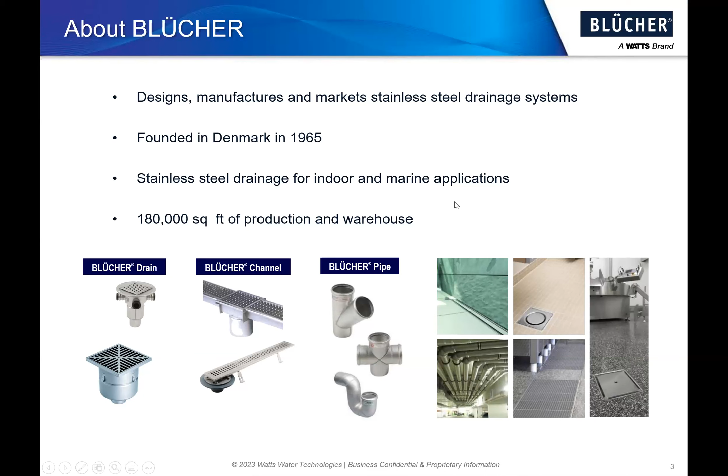There are various types of product lines related to that, as we'll get into, and lots of certifications: IAPMO certified, NSF certified, HACCP, ISO, FDA Modernization Act, ASME standards. Blucher gets quite involved in all of those programs and in the testing.

As I mentioned, it's a global brand, with locations in the USA and Canada here in North America, and all over Europe: Denmark, of course, where it was founded, England, Norway, Germany, Sweden, the Middle East, Asia Pacific. Really quite a global type of company.

Typical applications where Blucher products are found include commercial settings like offices, hotels, hospitals, rec centers, airports, etc. Industrial applications include food and beverage facilities, pharmaceutical, chemical, and biotech. Marine is a big market for Blucher too: cruise liners, yachts, custom yachts, naval vessels. In fact, 85% of the world's cruise liners use Blucher drainage on their ships.

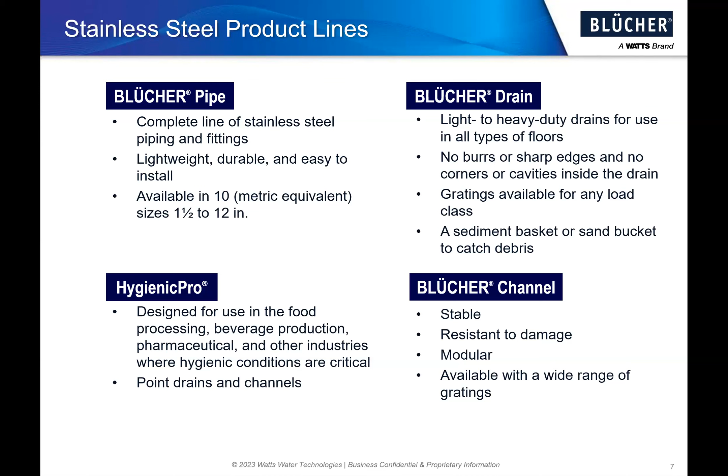So a good collection of product lines to meet a good variety of applications. Specifically, where I guess we would differentiate ourselves from other types of drain products is in the hygienic focused facilities.

In those types of facilities, drains and floors are really important for keeping the hygienic environment in that facility. So it sees all the traffic, any of the waste or dirt ends up on the floor.

It is subjected to some extreme temperatures, either from high temperature discharge from a tank of scalding water or scalding liquid, and also the cleaning and sanitation programs in those types of facilities tend to use very, very hot, scalding, near boiling type of water, and that can be hard on materials.

It can change the makeup of some materials. It certainly leads to thermal expansion and contraction. So those are things that are factors in those types of facilities.

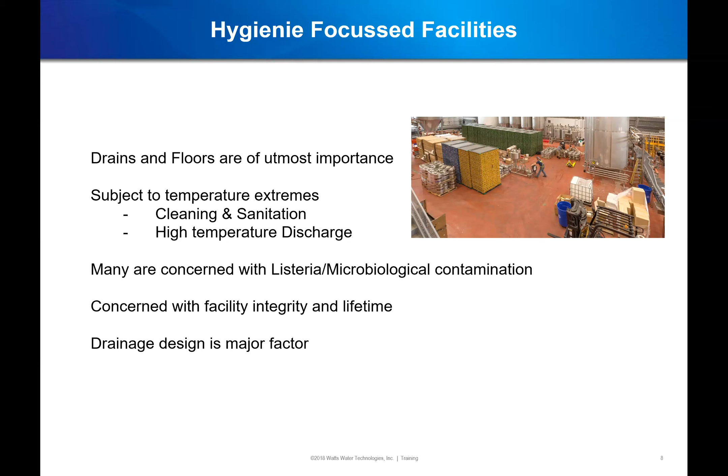So you want to make sure that you're using products in that facility that do that. And of course, drainage is a major factor. It's not a profound statement, but the drains need to be at the low point of the floor, for instance, and you want them to tie into the floor. So it's more than just a hole in the floor. It's more than just an add-on. And that's what we'd like people to think about.

Here we're talking about 5 key factors of controlling bacteria. I got this from a seminar hosted by the North American Meat Institute, where they teach meat processors how to manage listeria.

So listeria is a bacteria. It's naturally occurring. If you have a meat facility, you're going to have it there, but you don't want to have it on your finished products going out the door.

So in that seminar, the 5 key takeaways were: hygienic design of the facility. You want your processing equipment to be designed hygienically so it can be cleaned.

If you've been in one, you'll see that they're all stainless steel. Obviously, on the equipment, it's easier to clean if it's stainless steel. You want to look at your traffic pattern so you don't have, say, raw meat passing by areas where you have finished goods or nearly finished goods.

Good manufacturing practices are important. A good sanitation program involves regular cleaning of the facility, and then another program where you're deep cleaning or deep sanitizing the system. But the last point is really important here, and that's clean, dry, uncracked floors.

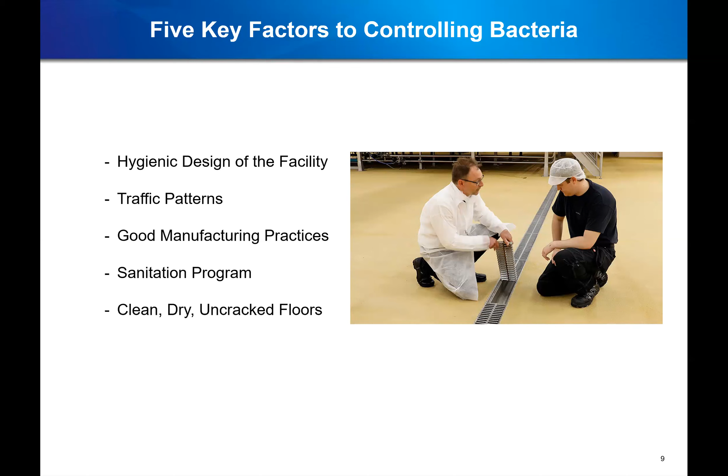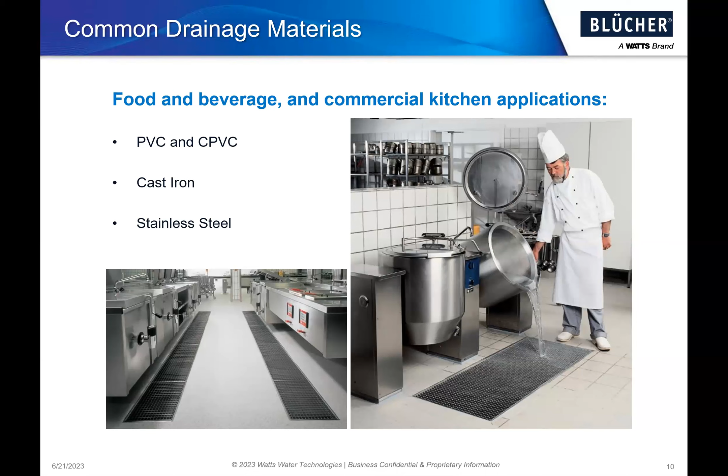Talking about the drainage materials, there are other types of materials used for drains. PVC and CPVC are common, cast iron is very common, and of course stainless steel. Stainless steel is exclusively what Blücher uses for their drains. You'll notice in these pictures, all of the food processing equipment is completely stainless steel, and that's for a good reason.

PVC and CPVC have some limitations. PVC shouldn't really be exposed to temperatures above 140 degrees Fahrenheit. That's typically where your industrial hot water heater is set to, and your cleaning process is probably between 180 and 195 degrees Fahrenheit. So you start to see that PVC really isn't the best application for places where that type of process is going on.

It can become soft when exposed to those temperatures. So if you're using a rodding tool to clean a clog, you may find that the tool can pierce through the bends and turns. There's also a fairly high amount of thermal expansion due to exposure to hot and cold temperatures.

It's about 20 times more expansion than stainless steel, and that can be an issue if it's in the floor providing a channel for your water to flow through. If it tries to get quite a bit bigger than the floor will allow, it will start to collapse on itself, and now you have a gap between the floor and the channel.

It's also flammable, and it can lead to toxic gases if there's a fire in the facility, etc.

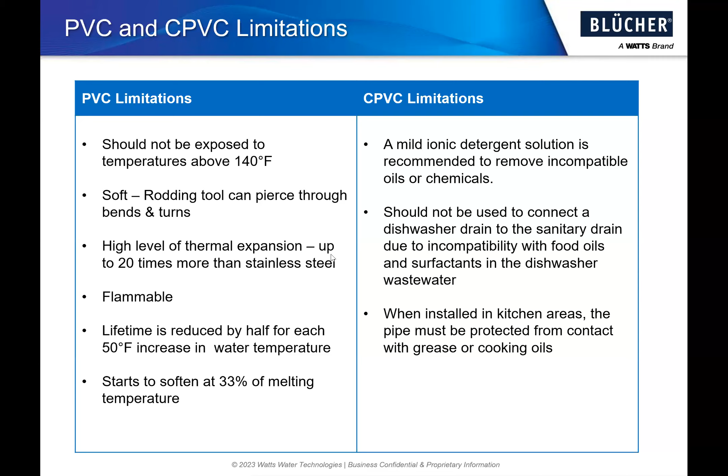Talking about thermal expansion and contraction, for continual use temperature: CPVC on the plastics is 220, PVC is 140, PVDF can get higher. Stainless steel we're showing here as 212, and that's because in our piping system we have a gasket, and our standard gasket is rated for continuous use at 212. But stainless steel itself doesn't melt until somewhere around 2500 degrees Fahrenheit, so it can take much higher temperatures for continual use.

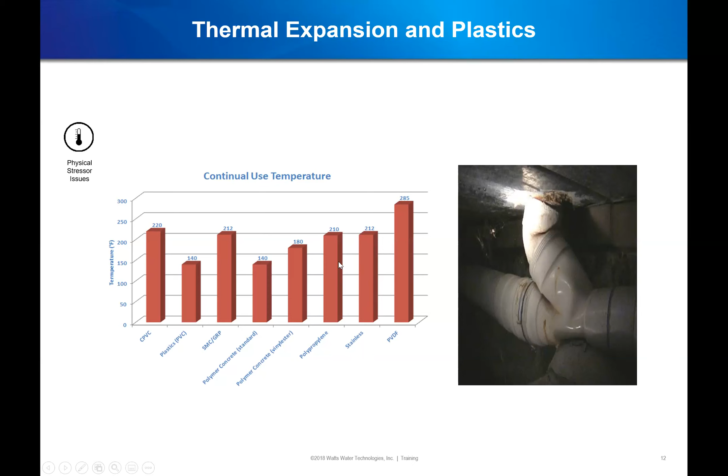On that point, this is something that comes up regularly in our discussions with engineers: continual use versus temperature spikes. That does come up regularly, where we're asked, hey, we have to get up to this temperature versus continual use.

If they're concerned about it, they're probably doing it somewhat fairly often, and at the very least, you'll be shortening the lifetime of that material in your facility. If it was my building and I was weekly exposing it to high temperature, I'd want to make sure it could take high temperature continually. That's the comment to let resonate: if it's happening regularly, that ties into continual use.

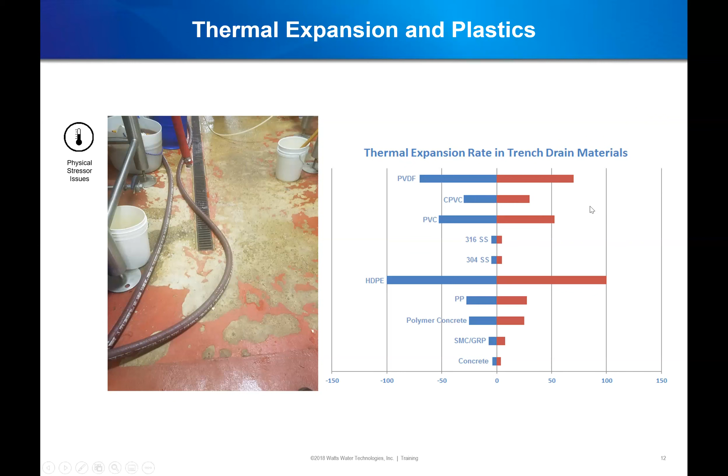So choosing the right materials is important when you're specifying drains or looking to purchase drains.

Cast iron is subject to corrosion—chemical, electrochemical, biological. So again, if you're using somewhat aggressive chemicals to clean your facility, they can lead to corrosion of your cast iron materials.

Even things like organics—if they are, say, in an oversized pipe for the flow, and without the velocity, you start to see solids settle out in the bottom of the pipe, and eventually they will start to break down and off-gas, creating H2S. The H2S will rise to the top of the pipe and condense on the inside top surface, then drip down and sit on the water line. You'll start to see lines running along like cracks along the length of the pipe where the sulfuric acid has eaten through it.

So again, if you're concerned about the longevity of a facility, you may want to look at other types of materials if you have an application that may lead to those types of situations.

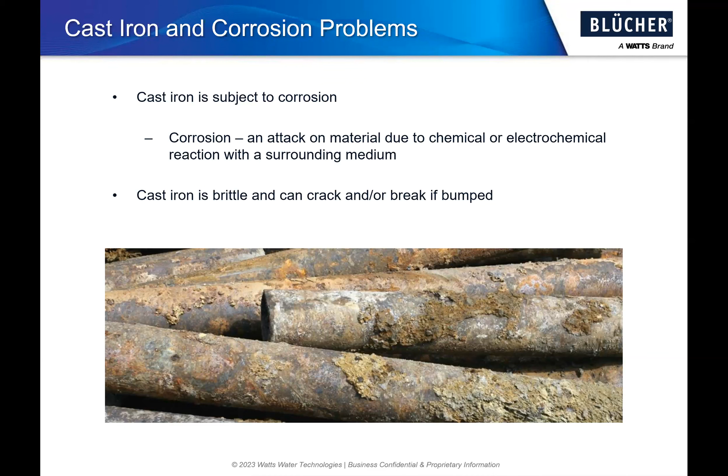Cast iron is also brittle, so it can crack or break if bumped. And quite frankly, same with the plastics too—the hard plastic pipes can break if somebody backs into them, and then they've failed.

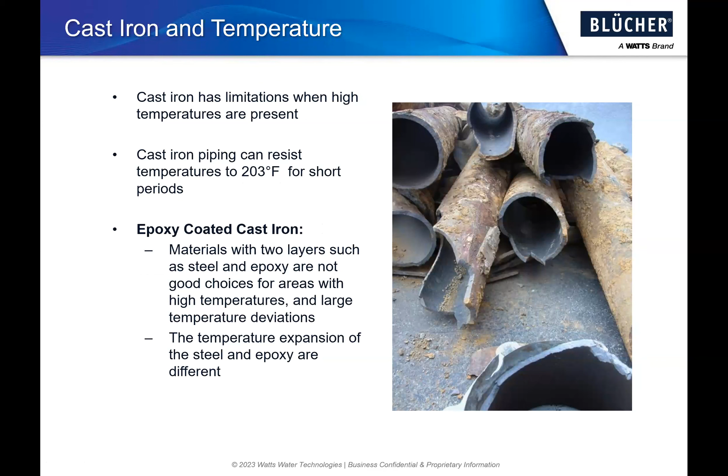So the answer, of course, is stainless steel. As we mentioned, hygienic facilities use stainless steel for their materials. It also makes a lot of sense on the ground, in the ground, for your drainage system, whether that's the drains, the channels, or the pipe and fittings.

Stainless steel is an alloy that has chromium added, at a minimum of 12%, to call it stainless steel. What happens is that chromium oxidizes and forms a passive film of chromium oxide on the surface, and that's what gives stainless steel its corrosion resistance.

One thing to note: stainless steel is not suitable for all drainage applications.

So there are some areas where you may want to check on the chemicals that you're using. High concentrations of chlorides could be an issue for stainless steel in some applications.

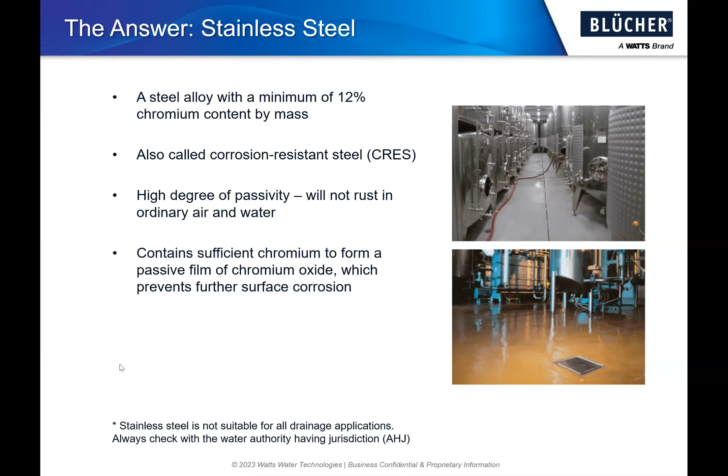So getting into the product range: industrial drains, floor and area type drains, floor cleanouts. Various sizes, various shapes, vertical outlets, side outlets, shower applications, etc.

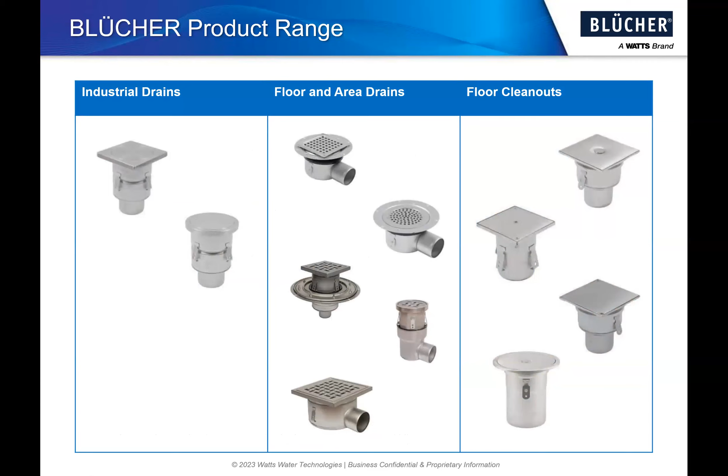They're heavy duty floor drains for all floor types. We have them for epoxy and floor coating applications, for tile applications, and for surface membrane or vinyl floor type applications where we have a clamp.

The left side of the drain on the left bottom there is showing a membrane clamp. That's used in an above grade application where there's a finished or used area underneath, and you want a sheet membrane to collect any water that gets underneath the floor and down to that level, funneling it down into the drain so it continues on its way.

We have them in adjustable or non-adjustable, so you can adjust the height. If you have a fixed height all the way through, then you don't need the adjustable. But typically on those above grade applications, you may find that there are points of the floor that are thicker, so you need a little bit of adjustment there. Of course, we have gratings for all load classes - they're all durable, hygienic, easy to clean, no sharp corners, etc., and simple to install.

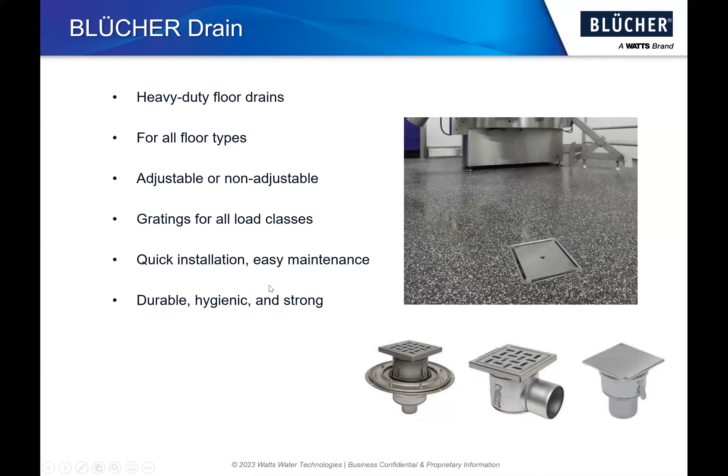A couple of my favorites here: the BFD 570, a 12-inch floor drain, area drain. It's part of our Hygienic Pro line, well priced with the Hygienic Pro grate that we'll talk about in a couple of minutes. The BFD 130 is a very popular model, again with that membrane flange all the way around that ties in and keeps the people on lower floors dry and happy.

And our hub drain, the BHD 200, comes in sizes - I think we're looking maybe even up to 10 inches now on this type of hub drain. This would be installed above the finished floor level to accept the discharge from a tank or a process without it making its way down onto the floor. Again, these are popular ones - I think they're well priced and good value.

Moving on to the lavatory shower drains and shower channels. These ones here are quite popular - I think every school in Alberta now is required to use these when they're building new or reconstructing a facility. Again, a good, well-priced drain, easy to use. The one up top here is for a tiled floor or an epoxy type floor, and this one here has a clamp - so if you had the vinyl sheet flooring, this one clamps down and ties that into the floor properly.

On a garage drain that may or may not be stainless steel, may or may not be the best application for that, if that's what the question is about. But talking about the fluctuation in stainless steel price, obviously we were hit with price increases on a lot of fronts over the past few years, but due to the fact that Blücher uses stainless steel exclusively for their materials, it's very important that they had a strong supply. Obviously stainless steel is a more expensive option than cast iron or plastic, and it was before the fluctuations.

But again, it's in the right applications. It costs way more to fix a floor because you put the wrong product material in than it does to do it right the first time. Yeah, I think that really explains it best.

It's an application specific product. The garage drain probably, even though stainless is a good alternative versus the salt that we have to weather in the Canadian winter, aluminum does that just as well. And if we use the FD 490 and the all aluminum from Watts, then there's a good option there that's right in line with the rest of the market on the product. But when you're looking more for these more specialized applications, it's cheaper to do it once with a slightly higher price point than to tear it down and do it twice. Exactly.

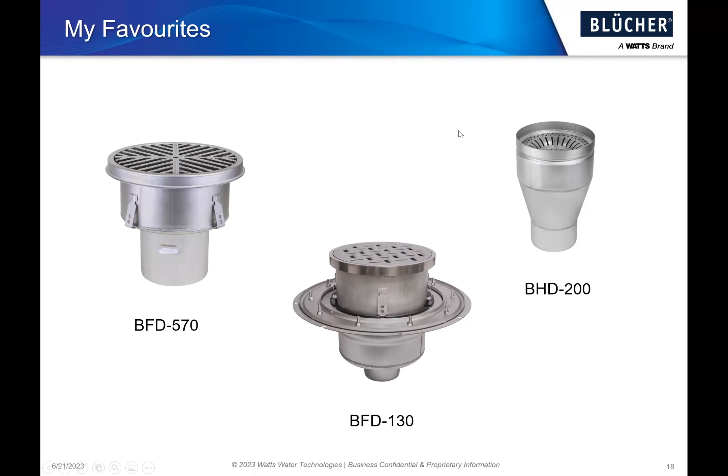Thanks for the question from chat. So just going back, we do the shower channels, which you'll see quite often in commercial buildings, recreation buildings. The one here at the bottom middle is a sheet floor type of application, like what you would see in a hospital or medical facility, and that top piece that gives you just that nice little clean slot in the middle actually clamps down around the flooring material and holds it in place. So a very nice looking drain that architects tend to get pretty happy to see, and I see it getting inquired and specified fairly often.

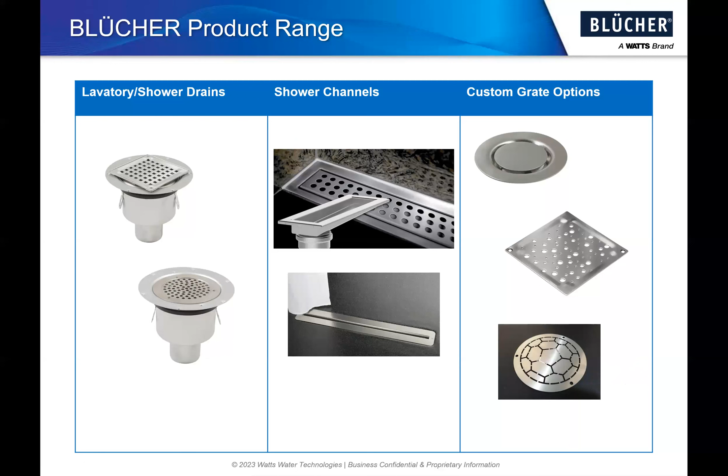And that's something that we can do, we need a minimum order of 50 to look at it. But if you're designing a facility that's going to have lots of floor drains, and you want to do something special with some branding, etc., that's something we can look at for you. Not every logo is going to work, obviously, because it still needs to function as a grate, and it still needs to support a little bit of foot traffic, etc. But certainly something to keep in mind.

We've recently introduced also within the drain line a ligature resistant option, both in round and square floor drains and in shower channel. Ligature resistant is a requirement in prisons, and certainly at the very least the mental health departments of healthcare facilities. And we now have a very nice and we think well-priced option for that.

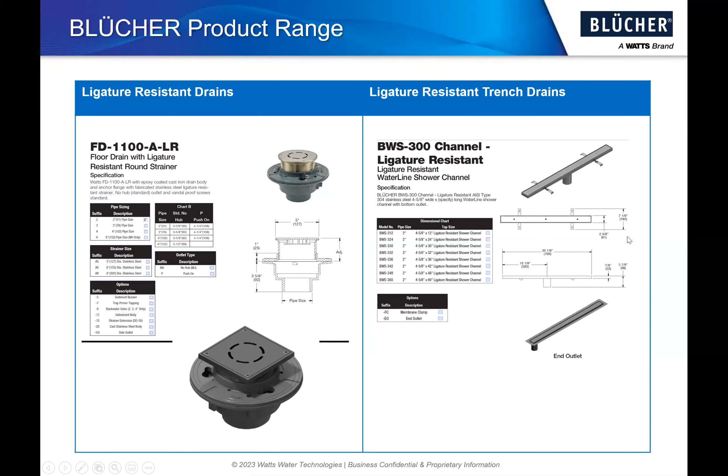These floor drains are in 5, 6, and 8-inch options, and will all be stainless steel, stainless steel body, stainless steel strainer, etc. And then the shower channels, 12, 24, 30, 32, 36, up through 60-inch options, all in stainless steel. You can choose the outlet location, end or center. And again, it's well priced and certainly designed for that particular application.

We do channels, which would be everything from the trench drain to these large, we call them a kitchen channel, but those large type of kitchen drains. For any type of floor construction, again, above grade, on grade, epoxy or urethane finish, or polished stainless steel finish, or tile.

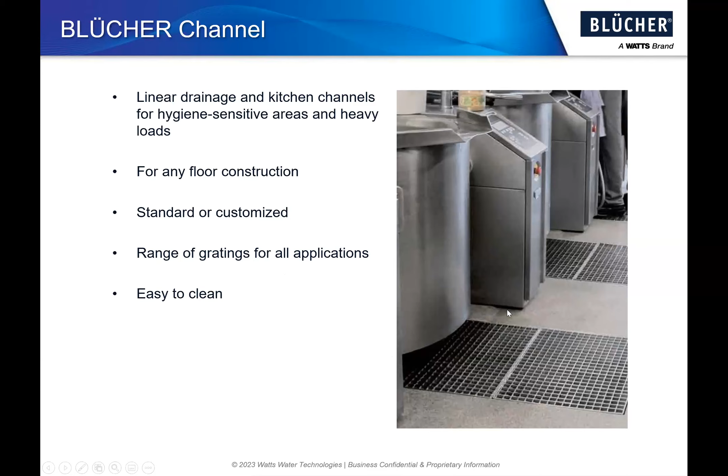We can customize them. We have a range of gratings available, and again, because they're stainless steel, they're easy to clean. All that stuff is made to order. You can choose 304 or 316 stainless steel. They're typically pre-sloped with longitudinal and cross fall. We've had a couple of applications where they wanted no slope, since there was slope on the floor already. That's an option too. There's a wide variety of widths, 3, 6, 12, on and on up to 32 inches wide, so we can make it to fit whatever that application is.

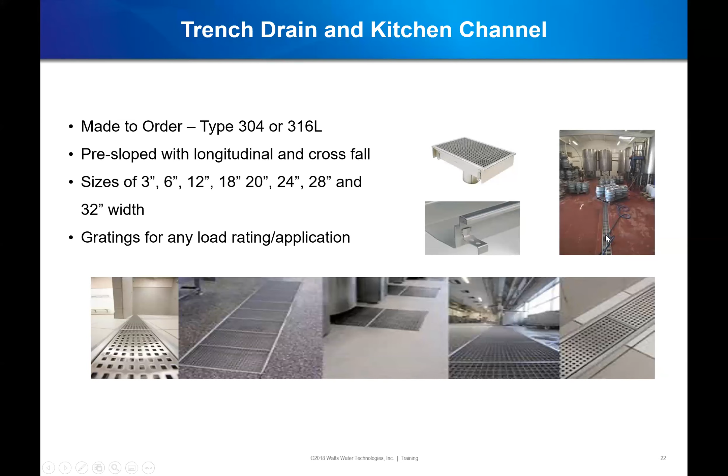Gratings for any load or application, whether that's a shower here on the left, probably a cart cleaning area here where they're using a mesh grate, and then up on the top here where there's our hygienic grating.

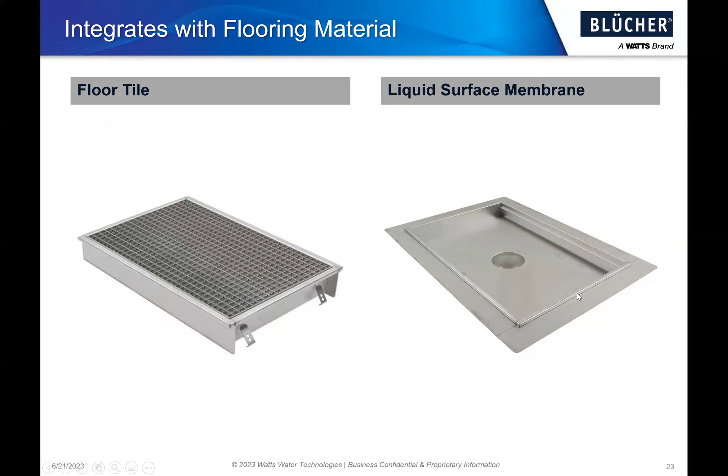So as mentioned, it works with either floor tile or the liquid surface membrane. If you have those types of applications, we're able to provide a channel that will tie into the floor properly. And again, it's important to tie into the floor, because if it's not part of the floor, then the water is going down beside it as opposed to down the drain, and that water is going to cause a problem. Maybe not today, maybe not tomorrow, but eventually it's going to cause a problem, and it could be a big one.

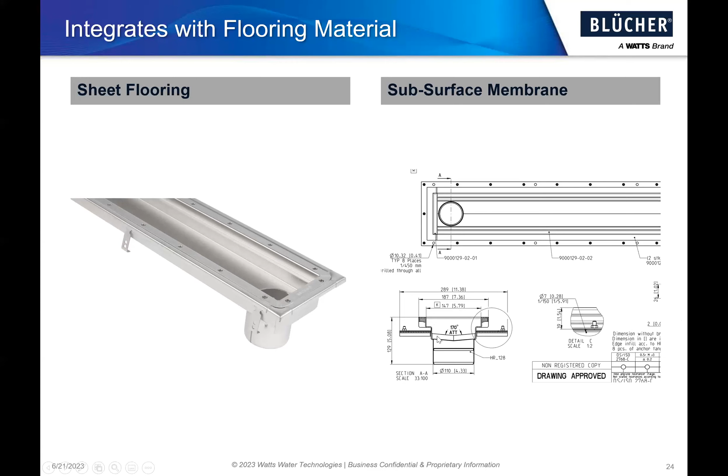And then subsurface, we're showing here on the drawing, this is an end view of the channel, and there is a clamp here for a subsurface membrane. Again, if there's a crack over here in the floor and water gets down, it'll find its way down in here, and in this case, it just enters into the drain and moves along.

So now moving on to our hero product, the Hygienic Pro channel. Again, it was designed specifically for food and beverage facilities. They are notoriously hard on their floors. They operate at cooler temperatures typically, and then expose the floor and the drains to sudden spikes of hot temperatures, whether it's a brewery dumping out a tank or a clean-in-place process that's dumping scalding water on the floor.

They have issues of separation of a trench drain from the floor, from the concrete floor around it. They have issues with solids. They have issues with keeping the drain clean and sanitized. So this was designed to answer all those things for a food and beverage type facility.

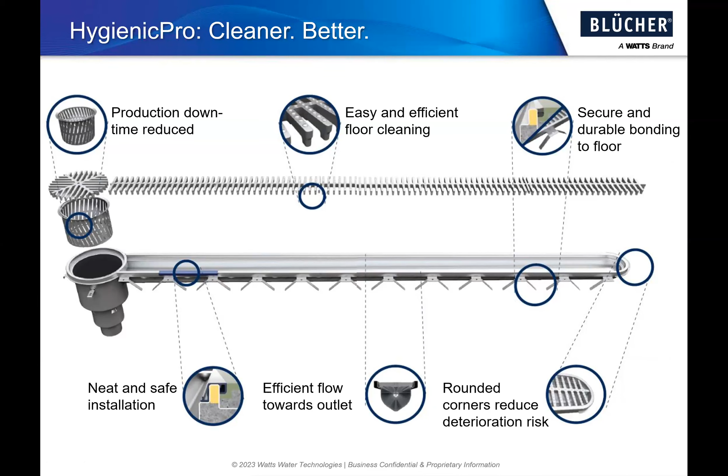And then lastly, we eliminated square corners, because inside square corners have a great deal of stress inherent in them. By eliminating that and making it round everywhere, including the outlet box, you take that stress and spread it out over a larger area, and you're less likely to ever see cracking at the corners, which was not the case with the square type channels.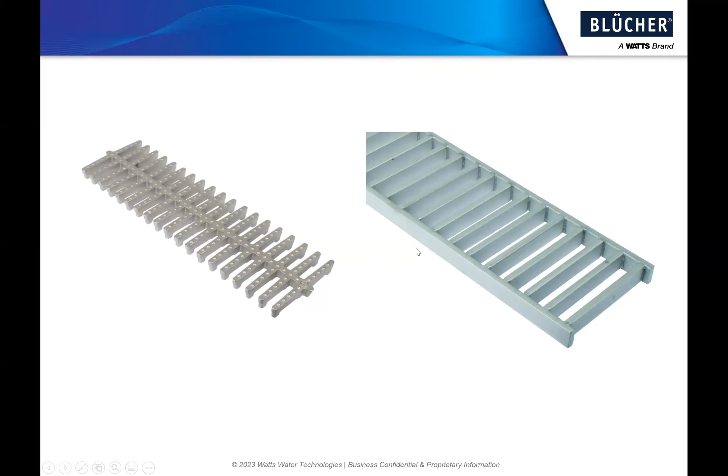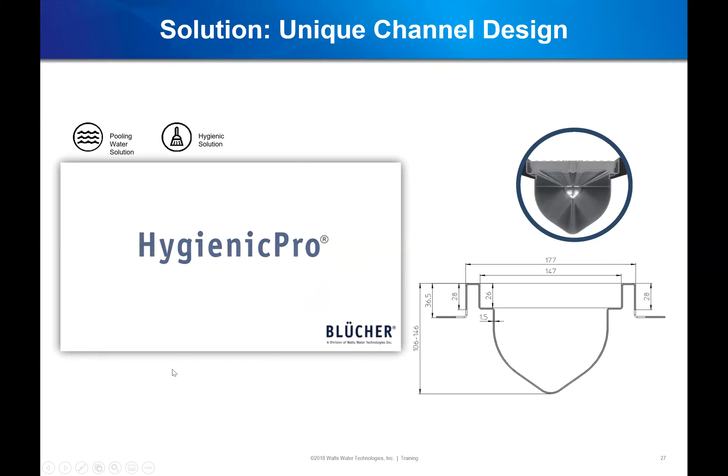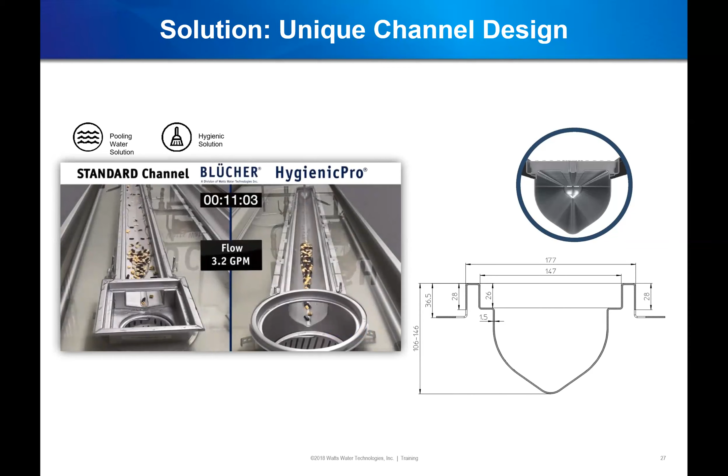So I have a video here that should run. I don't know if it'll have sound, but there's no speaking anyway. This is comparing the Hygienic Pro channel fluid dynamics versus a regular standard type of stainless steel channel. Same amount of material. These are actually side by side in a rig at Watts in the Boston area, and they're seeing the exact same volume of water at exactly the same time. We can see here that in the Hygienic Pro instance, it pretty much cleaned itself out, just with the little bit of water that it was seeing.

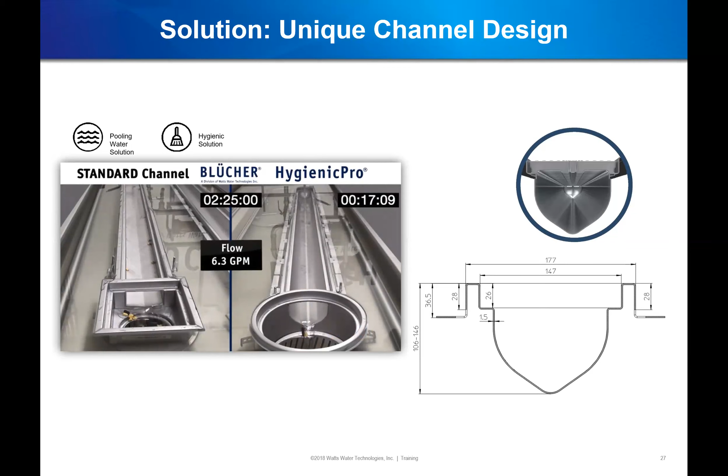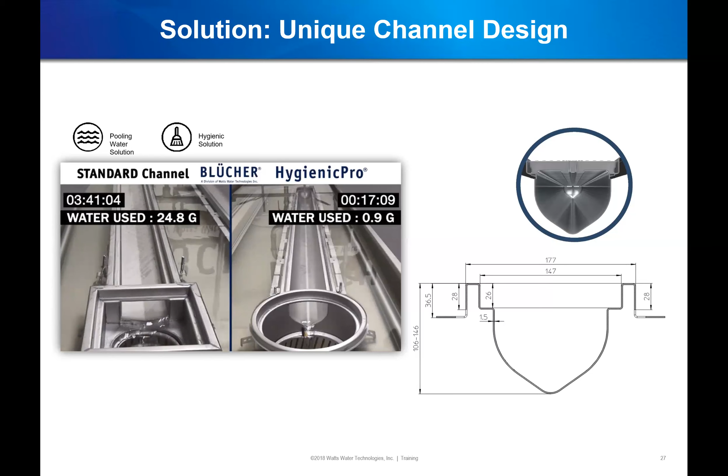On the left side, we had to keep increasing the flow, and eventually to get the last bit of it, we had to completely flood the channel, and here it comes. So 17 seconds versus 3 minutes and 41 seconds. Less than a gallon on the Hygienic Pro side versus almost 25 gallons on the other side.

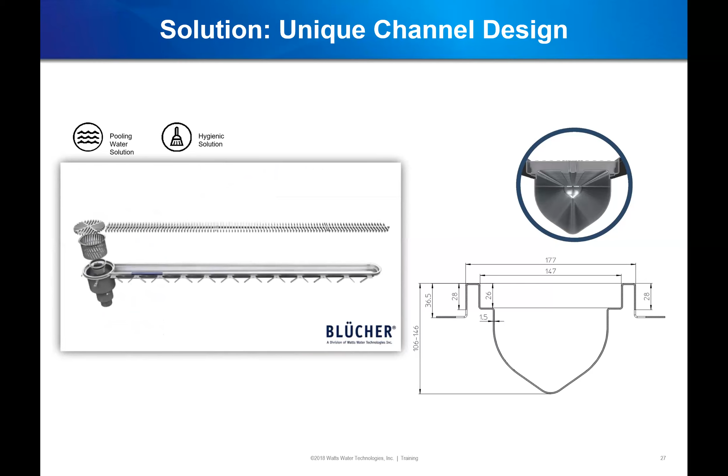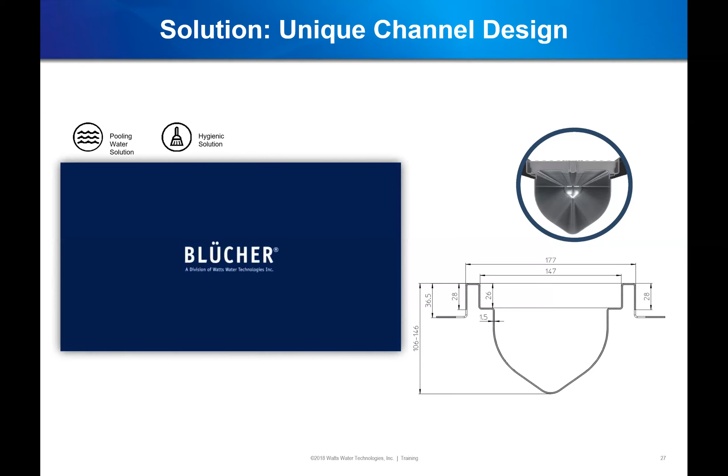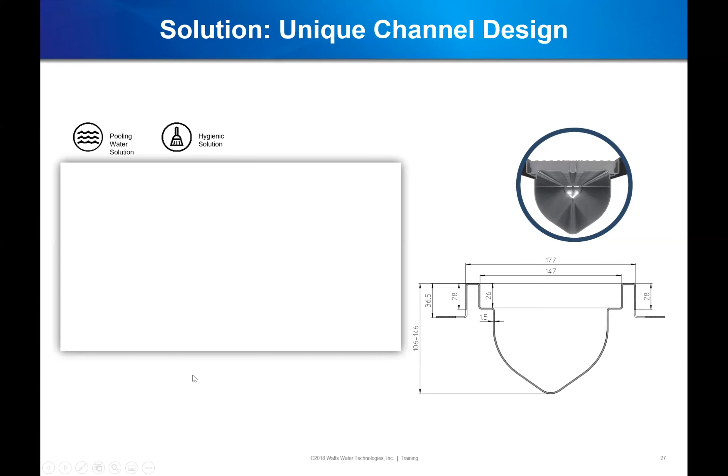So really what that means is this material is making its way into the channel. Quite often the water that's taken it from the floor is enough to flush it down the drain, and once it's down the drain and past the P-trap, it's not going to need to be cleaned again.

So it's funny, the water conservation discussions that always come up. We're saving fractions of water here and there on faucets, and even more on service sink applications these days, looking for restricted flow. But really your pipe design and the type of product you're selecting for drainage is saving more water there than they would on any sort of faucet aerator that they're putting in.

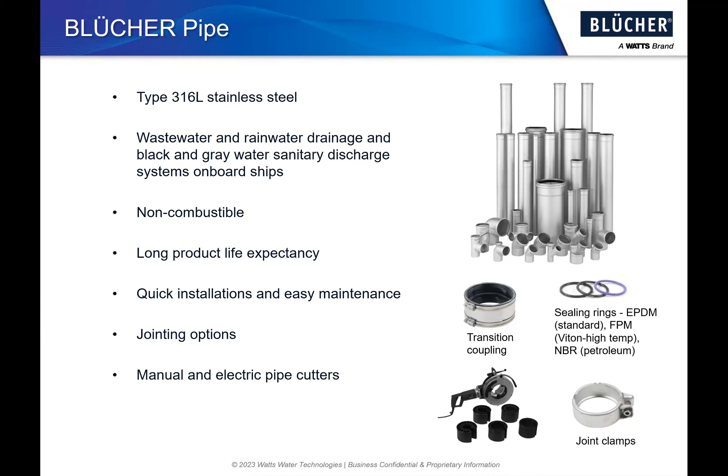So we have joint clamps here for adding some additional pressure capabilities, and then we also provide manual and electric pipe cutters. So if a contractor is installing this system, we have pipe cutters available for them to use for the installation, and upon return in good condition, they'll get credited for the return of the material.

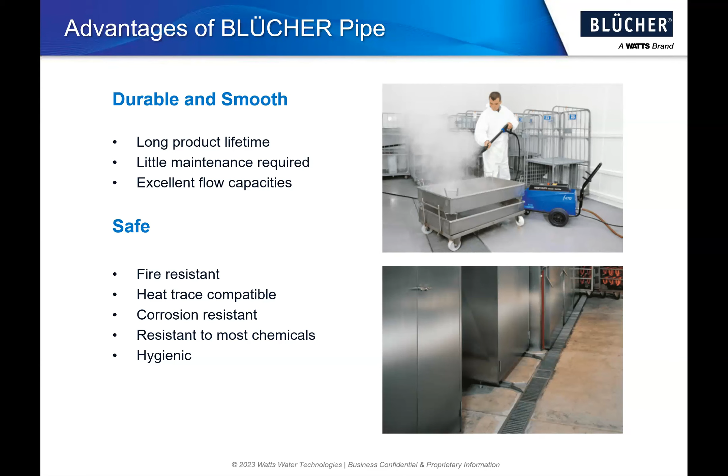So advantages of Blücher pipe — well, like stainless steel, it's durable and smooth, lasts a long time, doesn't require a lot of maintenance, fire resistant, it's heat trace compatible. So if you have oils and fats and you want to keep those in liquid form, you can do that. Very corrosion resistant to most chemicals, hygienic, of course.

Very sustainable, 100% recyclable, and wherever possible, Blücher will source recycled stainless steel. There's not enough of it to do exclusively recycled, but certainly you have a very sustainable option.

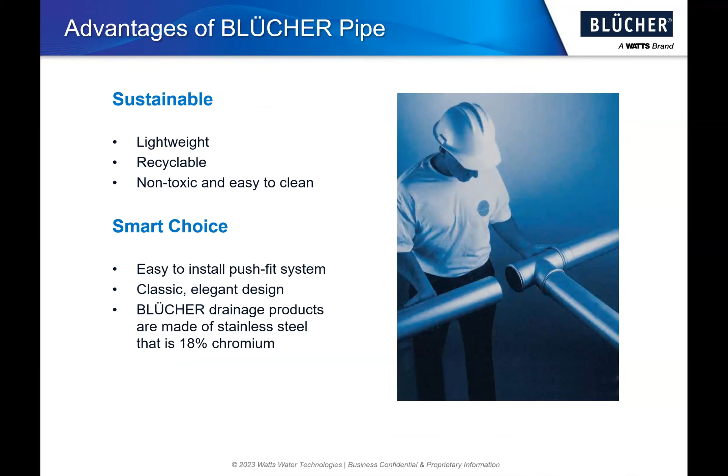Easy to install, it's lightweight — you can see it's a push fit system. Advantages of push fit: it's quick, you don't need specialized workers, so there's no skilled welder required, no flame watch or fire watch. It's a quick and easy little training to give somebody who has a little bit of common sense. They can be trained to do 500 connections in a day quite quickly.

So all the fittings are prefabricated with drainage shape, smooth surface. There's a little bit of expansion in every socket, so you don't have to worry about thermal cracking.

Blücher leak tests every single part at the factory before it comes out. All the welds are properly done with protection gas inside and out, and then everything is neutralized in a pickling bath so that you don't have any contamination inside the pipe. If you're welding that, you obviously need skilled labor, and when you're welding stainless steel, you need some gases inside the pipe at the same time.

It's time consuming and it's expensive. And then the same with mechanical — it just takes a long time.

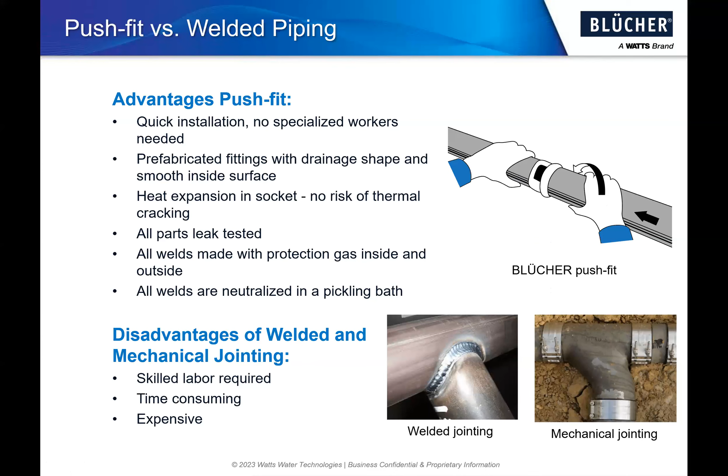Literally with this push fit, you have a hub and spigot, and you lubricate the ends and you slide them together. There's a little bit of a detent there to stop you when you reach the end, and if you get that, you just back it up a little bit so it allows you some expansion and contraction in the joint. But again, very simple.

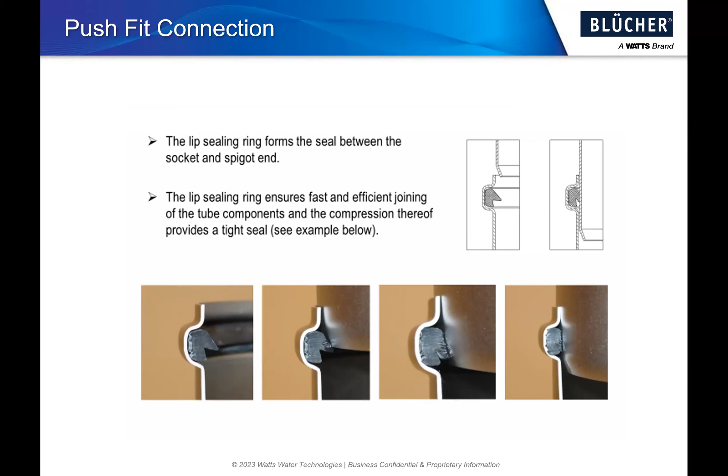Showing here the sealing ring that's inside the hub part, you can see that it is shaped so that it compresses against itself, and it becomes a very, very solid connection. It is possible to remove it, but it would damage that — it would take quite a bit of force and twisting. But it's also strong enough that it could last decades and decades. We've seen piping systems that have been in the ground for 25 years, and they're wanting to add on to it, and they look like they were just installed yesterday.

So now you're probably thinking, well, stainless steel is an expensive material for drainage pipe, and as a line item it would be, but there are other costs involved because you also have to get that installed. So to prove our point, we had RS Means do an independent study of the installation times of Blücher versus PVC versus cast iron piping systems. The exact same location — all three systems were installed in the same location, the same crew, the same layout — and these were qualified installers with 20 plus years of installing pipes.

What came out of that is that the Blucher pipe installed in a quarter of the time of the cast iron pipe, and a third of the time of the PVC pipe.

So if you start factoring in the labor involved of two workers putting that together, it quickly adds to the cost of the total installed job. In most metropolitan markets, the labor rate is significant enough that labor will more than make up for the cost difference of the line item for the pipe, and you'll have a longer lasting piping drainage system. For contractors, once they get onto this, they love it because it goes quickly and it's lightweight.

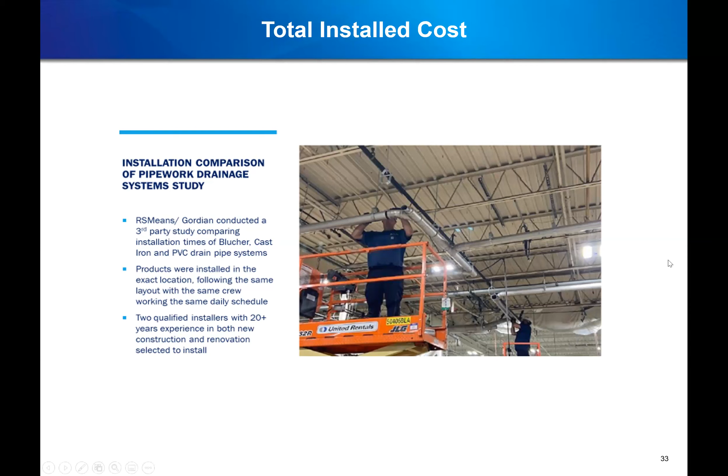One person can carry an 8-inch pipe 10 feet long of the Blucher pipe, but that's not the case with other materials. There's no glue or smell from the cutting or the glue itself. So there's a lot of good reasons to consider it, and most of all, obviously, it's a high quality product.

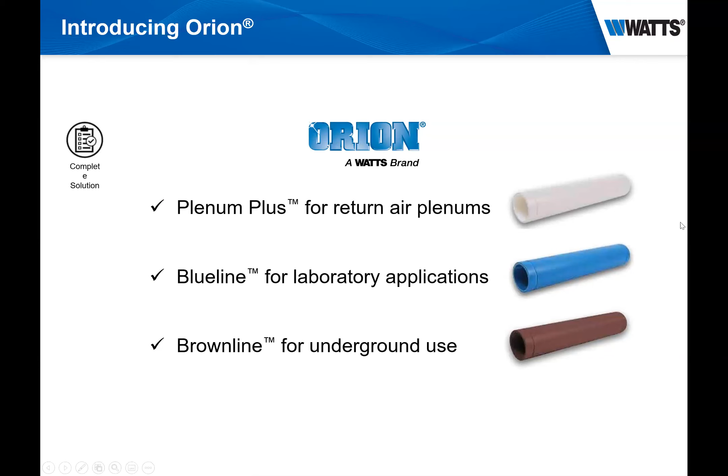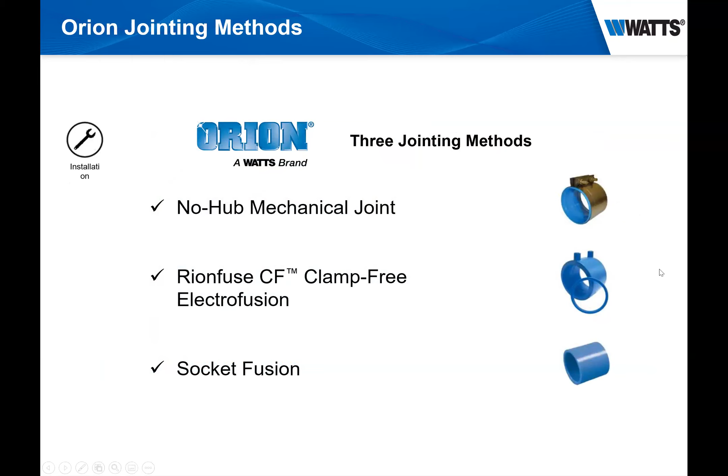Another Watts brand in specialty drainage is the Orion brand. They have 3 different product lines available for laboratory, underground use, and return air plenums. There's some advantages to the chemical resistance of these types of materials. We have a number of different joining methods, whether it's the no-hub mechanical joint, socket fusion, or our own Rionfuse clamp-free electrofusion.

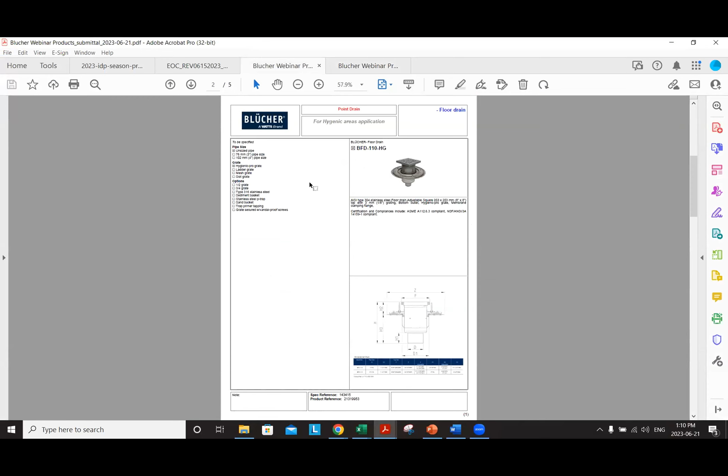I've already popped that open because I always anticipate being a little behind on time, so you can see I've got some more formats opened here. We've got our Blücher webinar products, that point drain that we talked about, and a customized version. If we selected a different grate or pipe size, that would be checked off versus unchecked. So it's customized to your project, to your selections on site. The model number changes, the selections change.

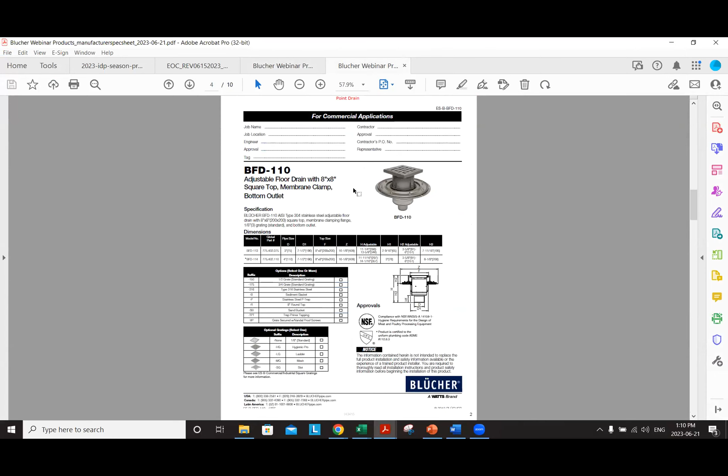We also have our manufacturer spec sheet format, where if you want some more detail on the product, you want to review the different options, maybe compare shop drawings that are being submitted to the products that you selected. This is a great format for that.

Some of the other formats, I want to show a schedule. We have a fixture schedule in Excel. One of the nice aspects of this—let me move this up to the top there—if there was backflow on the project, hot water, pumps, accessories, anything else, we have different schedules for different product types. So if you have fixtures, drainage, water heaters, backflow, you'll have different tabs for each with different headers customized to the type of product category you're looking at.

And of course, it's an open and editable Excel sheet, so you could go and copy and paste this and put that directly into your CAD drawings.

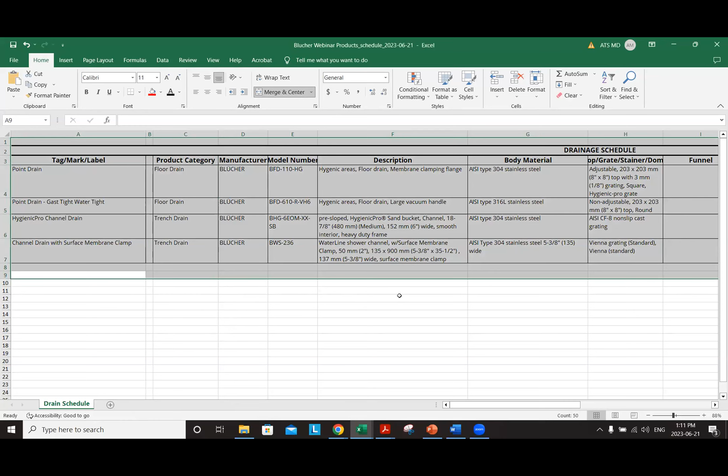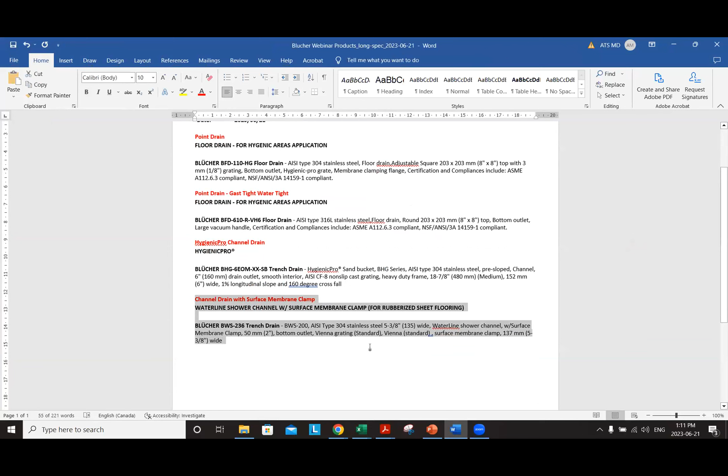Last format that I wanted to show, our Word format here, where we've got different levels of formatting. Again, you can copy and paste this, put it directly into your larger Word output specs.

Now, again, if you did want to copy from a master, maybe you only want some of these projects, some of these products, you can check the box: copy to, create new, create another project, create another specification, whatever you need to do. You can copy just those limited selections if you need, and then download it quick and easy.

We think it's a great tool that saves a ton of time. Hopefully you guys do as well.